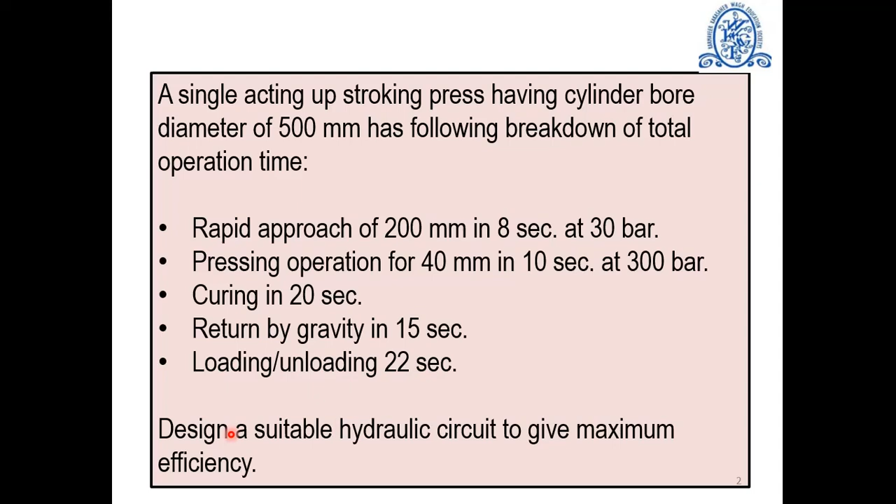So what is upstroking press? In upstroking press, the piston carrying lower half of the mold moves upward and upper half of the mold is fixed. You can watch this video to understand the operation of upstroking molding press. The upstroking molding press has few advantages. The first one, the return is by gravity, and thus electric motor is not running during this part of cycle, and thus it saves energy.

Another advantage is that there is no issue of overrunning load, which forces actuator to move in an uncontrolled manner, as in case of downstroking press, especially with meter in speed control. Use of counterbalance valve or meter out speed control eliminate this problem, but at the expense of efficiency and thereby energy. The bore diameter of the cylinder is 500 mm.

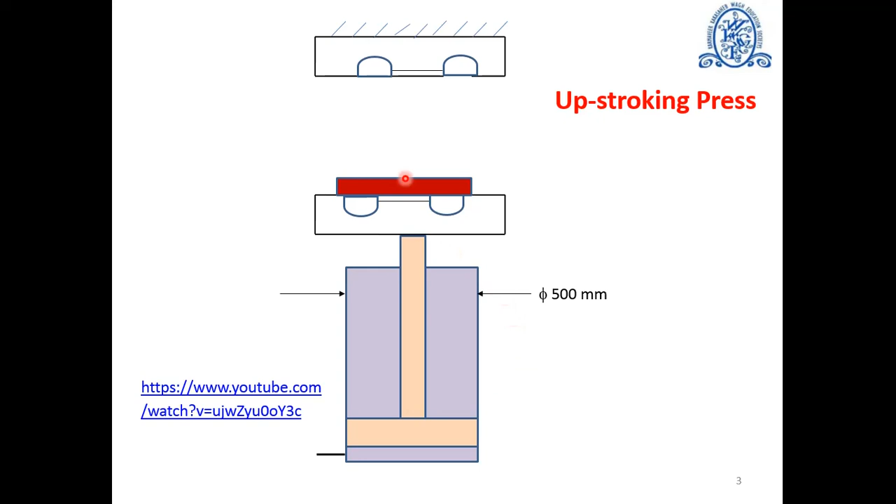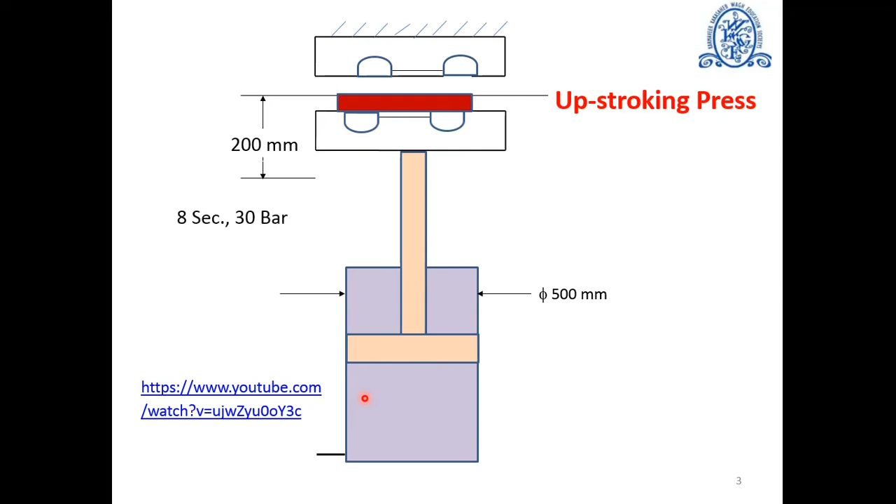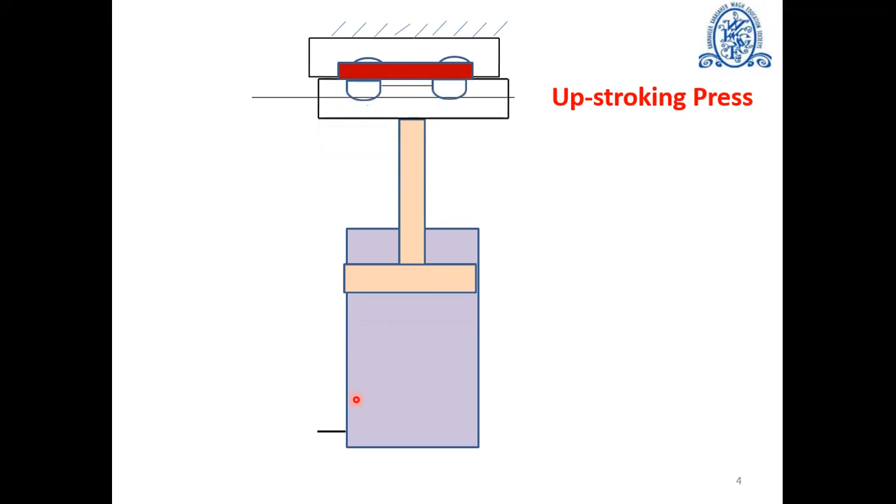After placing the charge in lower mold half, the pressurized fluid enters the full bore side of cylinder and piston moves up rapidly for 200 mm in 8 seconds. The pressure here is 30 bar to lift the load up. During next upward movement of the piston by 40 mm, which occurs in 10 seconds, the mold is forcefully closed to force the charge to flow and fill the mold. The actual pressure required for this pressing operation is 300 bar. The mold may be heated with electric cartridge heater.

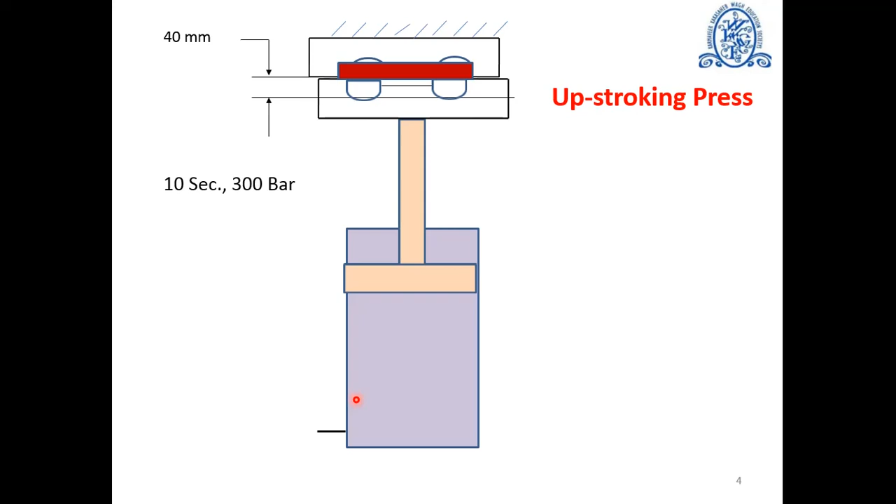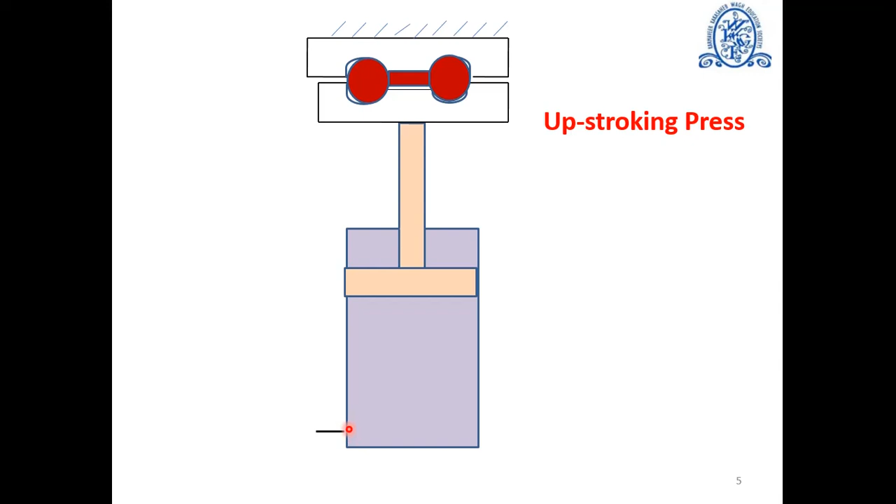The charge is then allowed to cure for 20 seconds at 300 bar pressure. The pump then stops and position of direction control valve is changed to let the fluid from full bore side to return to the tank, causing retraction of the piston. The piston will retract fully in 15 seconds. The molded part is then unloaded and fresh charge is loaded. The loading and unloading takes place in 22 seconds. Now our objective is to design hydraulic circuit which will offer maximum efficiency.

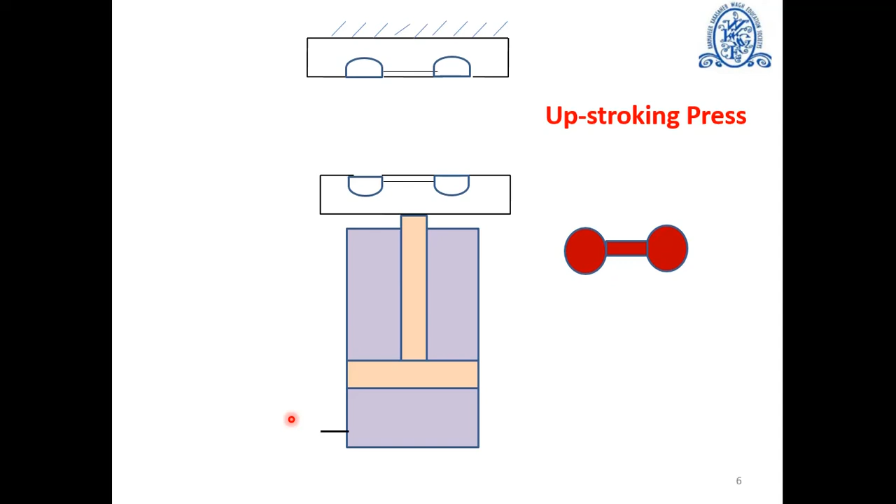The system efficiency is the ratio of work done to energy supply. So before we actually design circuit, we will first analyze these operations to determine the work done for each operation. The work input will depend on choice of our design. The first operation is rapid approach, for which the piston moves through 200 mm, that is 0.2 meters, in 8 seconds, that is in 0.133 minutes. Thus the speed of the piston is distance travel upon time, that is 1.503 meter per minute.

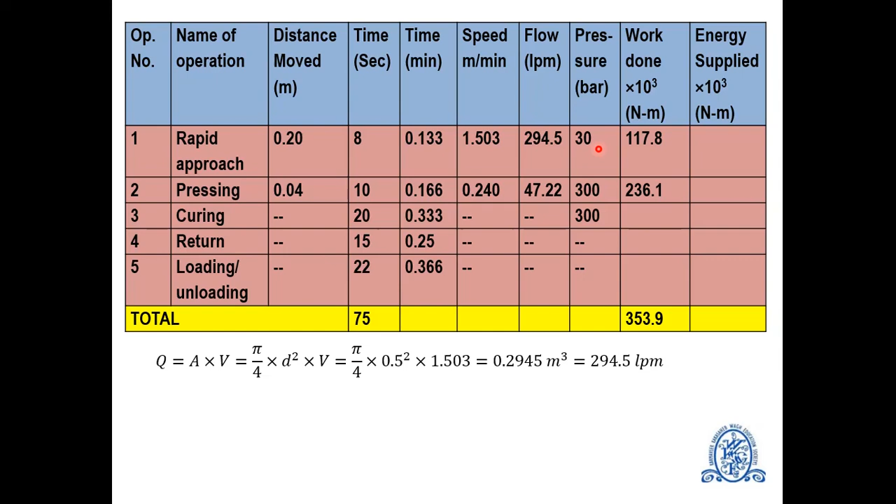Since the piston diameter is 500 mm, that is 0.5 meters, its area is pi by 4 d square and the speed is 1.503 meter per minute. The flow rate is given by A into V, which is 294.5 liters per minute. The pressure required during this part of cycle is 30 bar. We know that if pressure P is in bar and flow rate Q is in liters per minute, then power in kilowatt is given by equation P into Q upon 600. Hence, the power required for rapid approach is pressure 30 bar multiplied by the flow rate of 294.5 liters per minute divided by 600. So this is power in kilowatt, which is 14.729 kilowatt, which is 14,729 watt.

The work done is power in watt multiplied by time in second. Thus, the work done here is 14729 multiplied by 8, the time in seconds, which is equal to 117.8 into 10 raised to 3 Newton meter. In similar manner, we can calculate the work done for pressing operation, which comes out to be 236.1 into 10 raised to 3 Newton meter. During curing process, since there is no displacement of piston, work done is 0. And of course, no work is done during the return as it is by gravity, and of course during loading and unloading operation too. The net work done is therefore 117.8 into 10 raised to 3 plus 236.1 into 10 raised to 3, which is equal to 353.9 into 10 raised to 3 Newton meter.

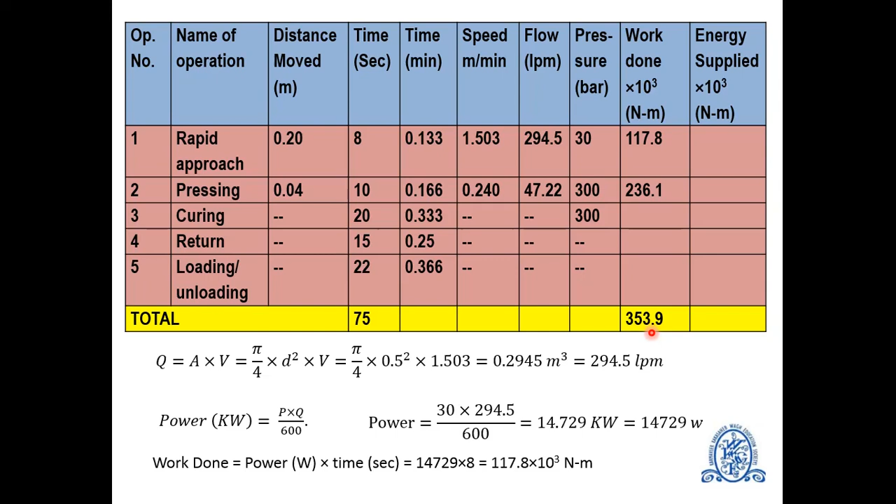Now, let us consider the first option as a single fixed displacement pump. Since we are using a fixed displacement pump, the flow rate capacity of the pump should be equal to the maximum flow requirement of the system, which is 294.5 liters per minute. Similarly, the pressure capacity of the pump should be 300 bar.

As shown in this circuit, the valve V1 is used to bypass the flow control valve. When the pump starts, it delivers 294.5 liters per minute for 8 seconds at 30 bar pressure. The flow will be through this valve V1 since it offers full flow and the flow control valve offers restriction to flow. This causes the piston to move up by 200 mm with a speed of 1.503 meter per minute.

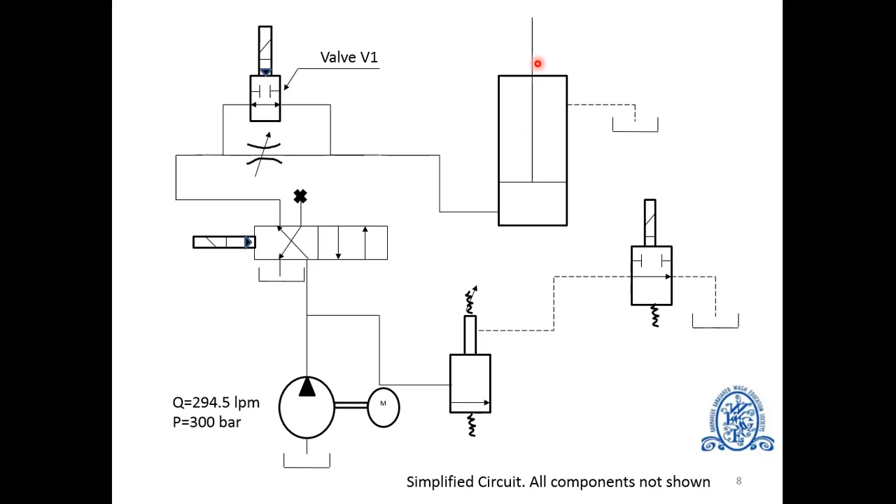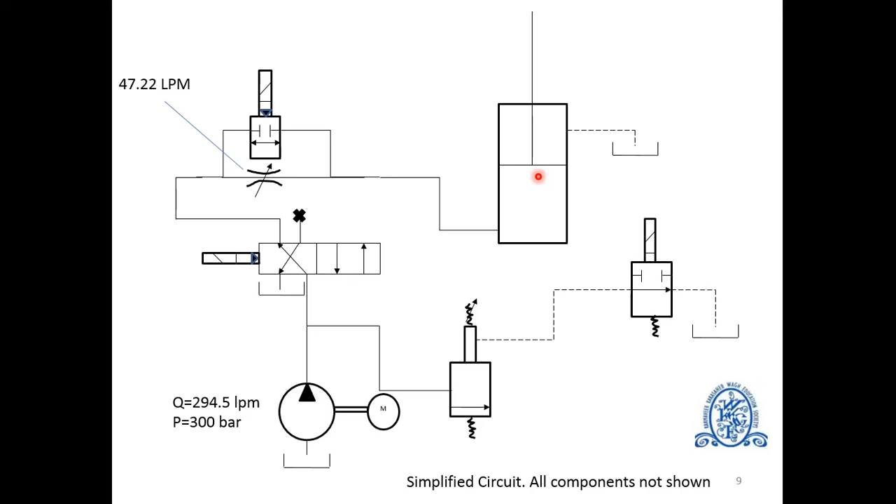After 8 seconds, the valve V1 will go to the off position automatically so that the flow will be through the flow control valve, which is set at 47.22 liters per minute. This causes the piston to move up slowly with a speed of 0.24 meter per minute by 40 mm. The pump will remain on for the next 20 seconds so as to maintain the system pressure of 300 bar during the curing process. After 38 seconds, the pump will go off

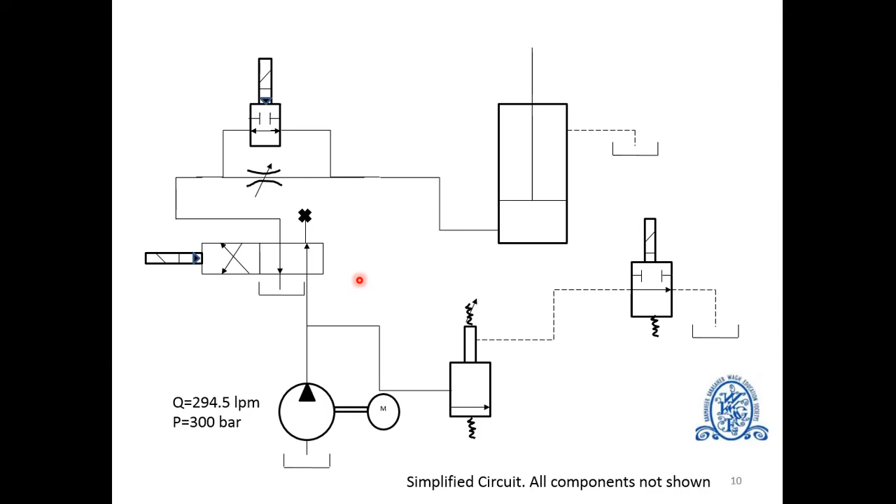and the position of the direction control valve is changed so that the piston will be retracted under gravity. The molded part will be unloaded and a fresh charge will be loaded for the next cycle. Now we analyze the input work using the fixed displacement pump.

During rapid approach, the pump flow rate is 294.5 liters per minute, and since the pressure is resistance to flow, although the pump capacity is 300 bar, the system pressure will be 30 bar only. Thus, the input pressure and flow are exactly the same as the output flow and pressure required. Hence, the input work or the energy supplied during rapid approach is 117.8 into 10 raised to 3 Newton meter.

Now, during the pressing operation, the pump is delivering 294.5 liters per minute, but the system requirement is only 47.22 liters per minute. The pressure is 300 bar. Thus, the input work is 294.5 into 300 divided by 600. This is power in kilowatt, multiplied by 1000, so power in watt, multiplied by time of 10 seconds. So, 1472.5 into 10 raised to 3 Newton meter.

During the curing operation, in order to maintain the pressure of 300 bar, the pump will continue delivering 294.5 liters per minute for the next 20 seconds. Hence, the input work during the curing process is 2945 into 10 raised to 3 Newton meter, which is twice that of the pressing operation. Of course, no input work is done during the return as well as loading and unloading operations.

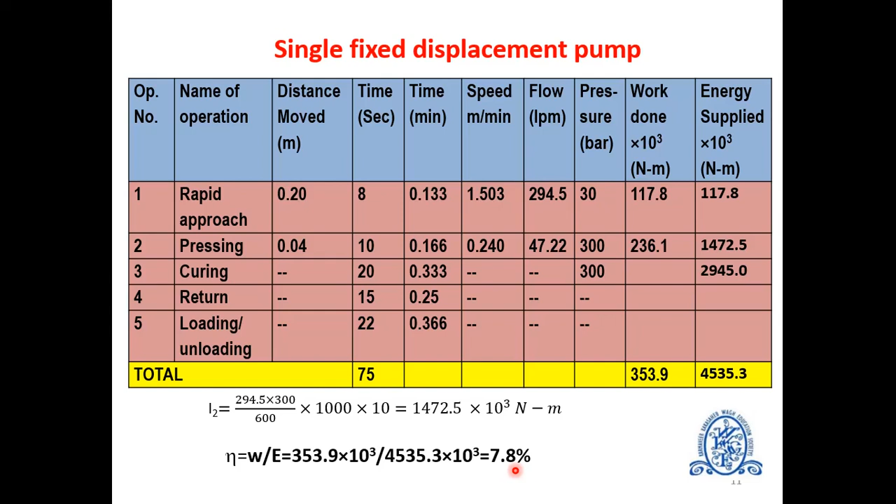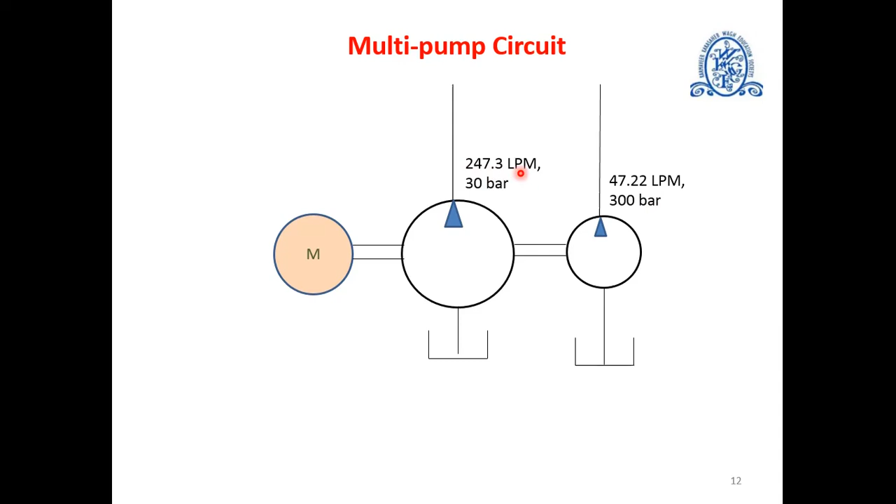So we will try another option using a multi-pump circuit. Here, instead of using a single fixed displacement pump, we will use two pumps as shown in this figure. The smaller pump with capacity 47.22 liters per minute operating at 300 bar, and a larger pump having capacity 294.5 minus 47.22, that is 247.3 liters per minute operating at 30 bar. Thus, when both pumps are on, the flow rate is 294.5 liters per minute.

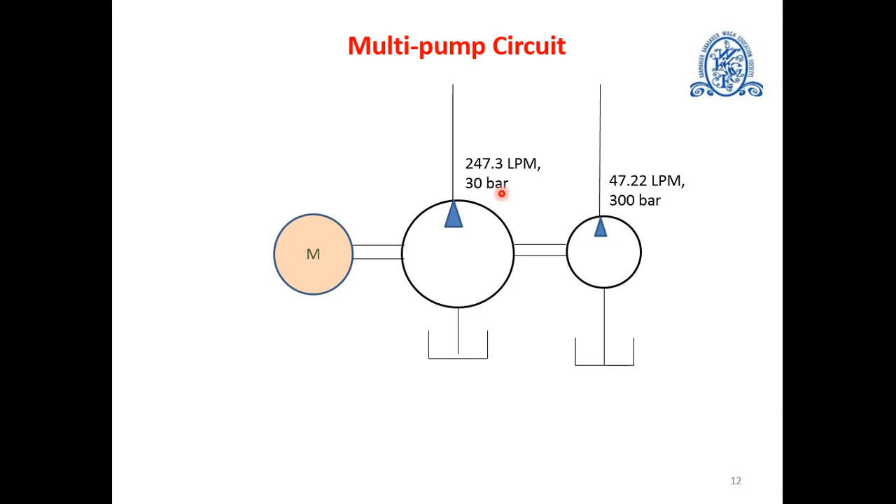Now during rapid approach, both pumps will be on supplying 294.5 liters per minute at 30 bar pressure. The energy supplied is therefore 117.8 into 10 raised to 3 Newton meter.

However, during the pressing operation, only the small pump is on and the large pump is off. Therefore, the pump supply is 47.22 liters per minute only, which is the same as that required by the system, and hence the energy supplied during this part of the cycle remains 236.1 × 10^3 Newton meter.

The small pump is running during the curing process in order to maintain the pressure of 300 bar. Hence, the work input is 47.22 × 300 / 600 × 1000 multiplied by the time of 20 seconds, which is 472.2 × 10^3 Newton meter. Thus, the total energy supplied is 826.1 × 10^3 Newton meter, and therefore the efficiency of the multi-pump circuit is

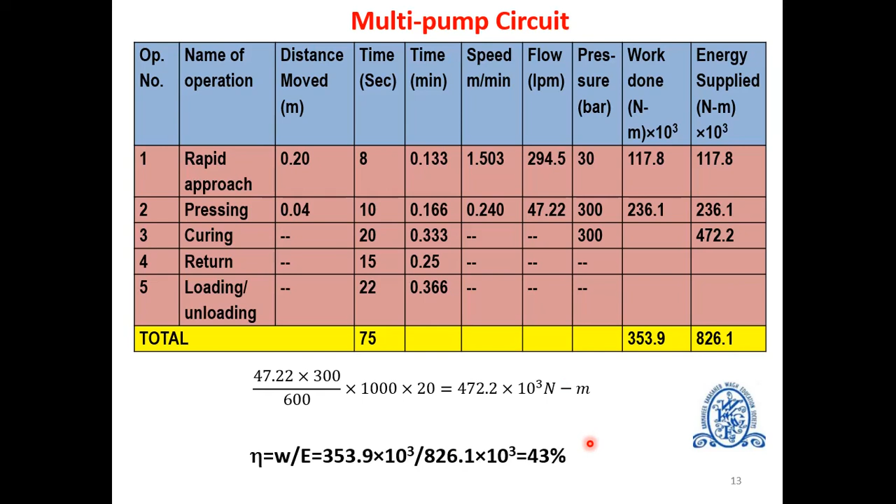43%. Still, there is scope for improvement in efficiency. So, we will now try the accumulator circuit. When we use an accumulator, we have to first decide the pump capacity. For that, we will first determine the total volume of fluid required during one cycle.

As shown in this figure, for the first 8 seconds, the flow requirement is 294.5 liters per minute, that is 294.5 liters for 60 seconds, and therefore for 8 seconds the volume of fluid required is 39.26 liters. Similarly, from 8 to 18 seconds, the flow requirement is 47.22 liters in 60 seconds, and hence in 10 seconds the volume of fluid required is 7.87 liters. Thus, the total fluid required in one cycle is 39.26 plus 7.87, that is 47.13 liters.

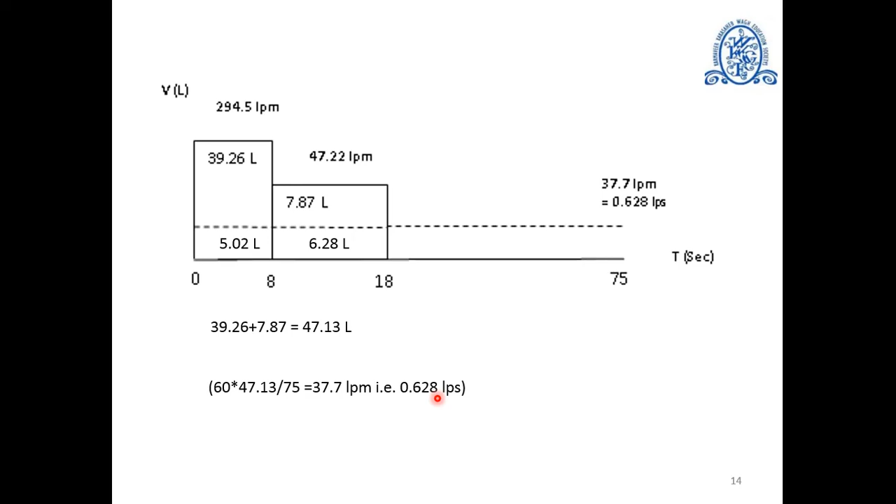If this value is distributed over the entire cycle of 75 seconds, the pump flow capacity will be 60 × 47.13 divided by 75, which is 37.7 liters per minute or 0.628 liters per second. Now, with a pump having a flow capacity of 37.7 liters per minute or 0.628 liters per second, during the first part of the cycle, the flow will be through this flow control valve. The pump will supply

0.628 × 8, that is 5.02 liters, and the remaining part, that is 39.26 liters minus 5.02 liters, that is 34.23 liters, will be supplied by an accumulator. The accumulator will thus discharge during this part of the cycle. Since the accumulator pressure is 300 bar and the fluid supply will be 294.5 liters per minute at 300 bar, the energy supplied will be 1178 × 10^3 Newton meter.

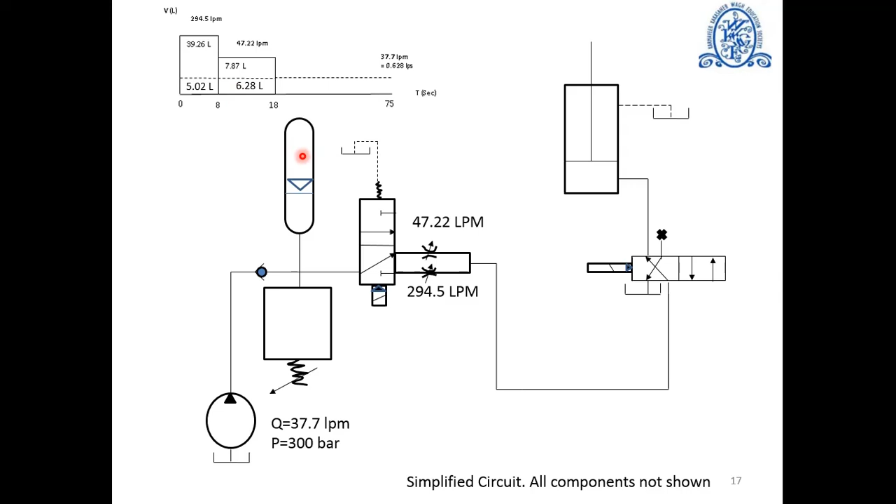Now, during the pressing operation, flow will be through another flow control valve. The pump will supply 0.628 × 10, that is 6.28 liters, and the remaining part, that is 7.87 minus 6.28, that is 1.59 liters, will be supplied by the accumulator. The flow rate thus is 47.22 liters per minute at 300 bar, and the energy supplied is therefore 236.1 × 10^3 Newton meter.

Since the pump is running for all 75 seconds, delivering 37.7 liters per minute at 300 bar, the total energy supplied is 1414 × 10^3 Newton meter. The system efficiency is therefore 25%. It should be noted here that although the cost of this design is more than the previous two designs due to the accumulator, the efficiency of the system is still inferior to that of the multi-pump circuit. It means more investment does not guarantee better performance of the system.

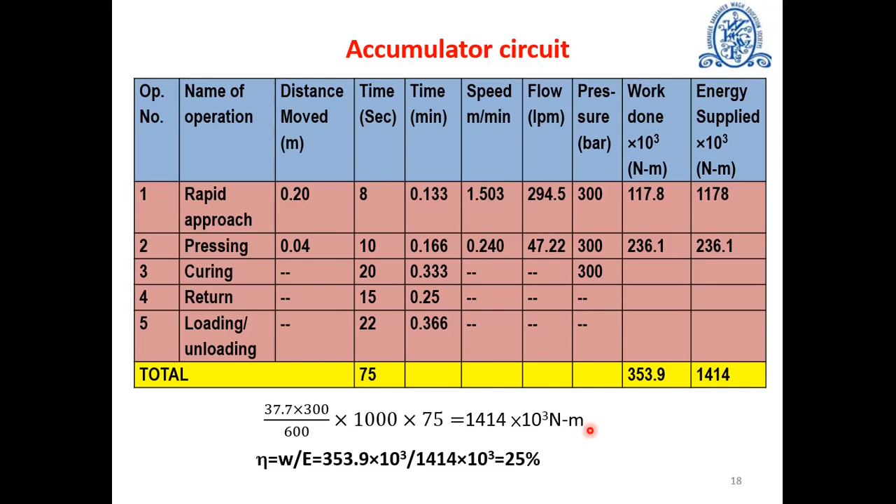The next circuit which we will be evaluating is the intensifier circuit. Like the accumulator circuit, for the intensifier circuit also we have to determine the pump flow capacity. Since the intensifier is used to amplify the pressure, the input pressure at the intensifier is the minimum system pressure, that is 30 bar, whereas the intensifier output is 47.22 liters per minute at 300 bar. From this we can compute the pump flow capacity from the energy balance equation. Q1 P1 is equal to Q2 P2, and therefore Q1 is 472.22 liters per minute.

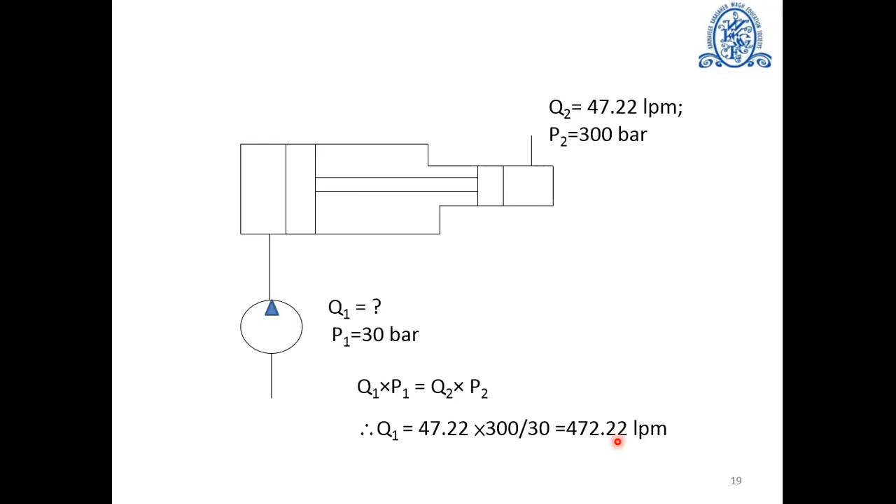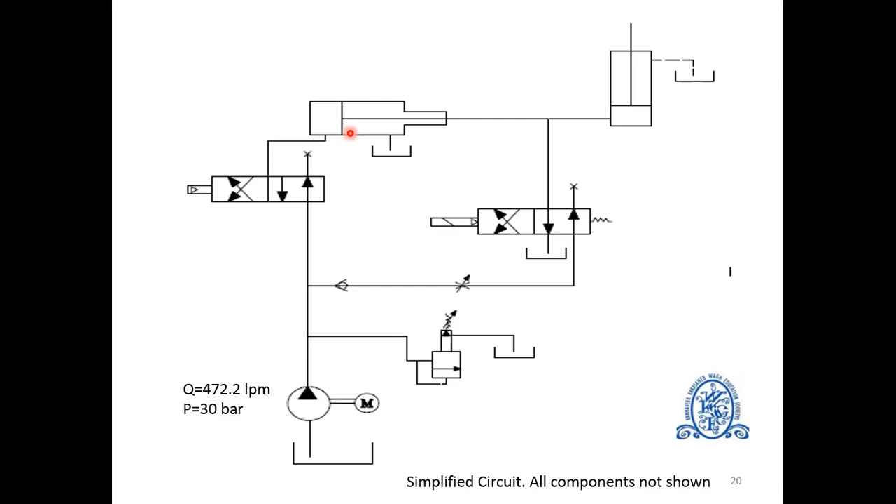During rapid approach, the pump will supply 472.22 liters per minute at 30 bar pressure. The flow control valve is used to adjust the flow rate for the system requirement of 294.5 liters per minute. During the pressing operation as well as during the curing operation, the intensifier will be used to deliver 47.22 liters per minute at 300 bar pressure. Thus, the intensifier circuit with the flow rate of 472.2 liters per minute at 30 bar pressure will be supplying this flow for 38 seconds.

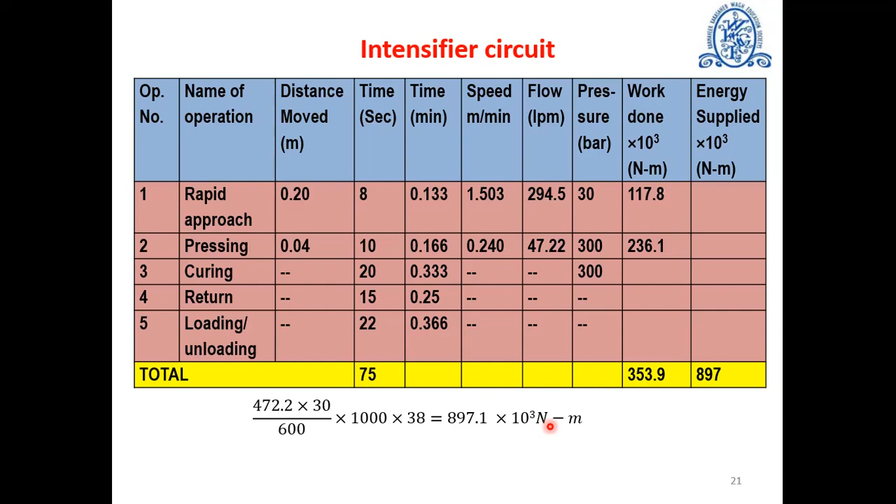Therefore, the energy supplied is 472.2 × 30 / 600 × 1000 × time in seconds, that is 38 seconds, which is 897.1 × 10^3 Newton meter, and the system efficiency is therefore 39.5%.